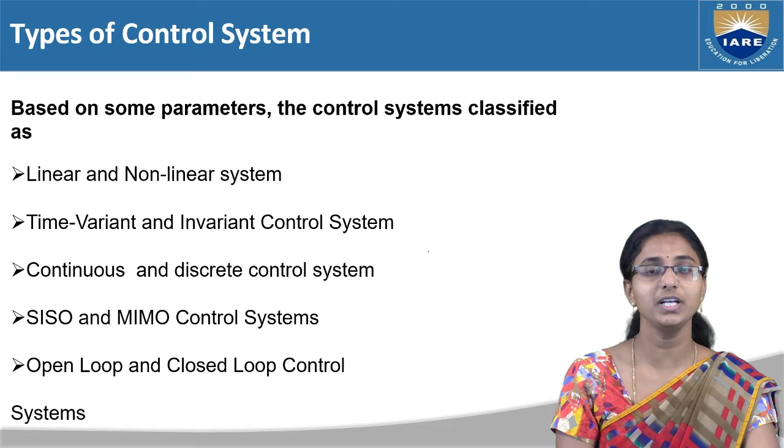Based upon the parameter of feedback, control systems are classified as open loop and closed loop control systems. These are the classifications based on each parameter. Now we will study in detail about open loop and closed loop control systems. So what are the two main types of control systems? Open loop control system and closed loop control system, classified based upon the connection of feedback.

Now we will talk about open loop control system. A control system in which the control action is totally independent of the output of the system is called an open loop control system. So what does this mean?

Let me take the example of a fan again. My fan is also a control system. By using a regulator with a fan connection, it becomes a control system. But if I want to change the speed of the fan, how do I do it? I manually go near the regulator and change it. This is done in an open loop system. So manual control systems are also known as open loop control systems — a control system in which the control is operated manually. Such systems are called open loop control systems.

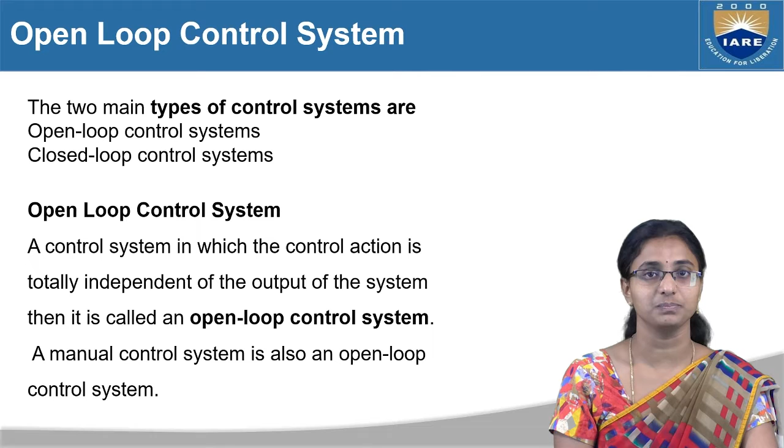So now let me consider this block diagram as a control system here. So here also we are having a system. So this is my system, right? And to this system I have used a controller. Okay, and here we are going to give the input. Already in the last class I have said to you, in a control system the input is always known as desired output. Okay, so I have given some sort of input here.

So just again recall the fan here. I'm giving an input, and this is nothing but indirectly regulated here. So here the system is nothing but the fan, it is operating, and I can see the output. Okay, so this is done here. But here, suppose I want to change the speed of the fan, it is not done without going manually. So this is nothing but your open loop control system. Here the function is open.

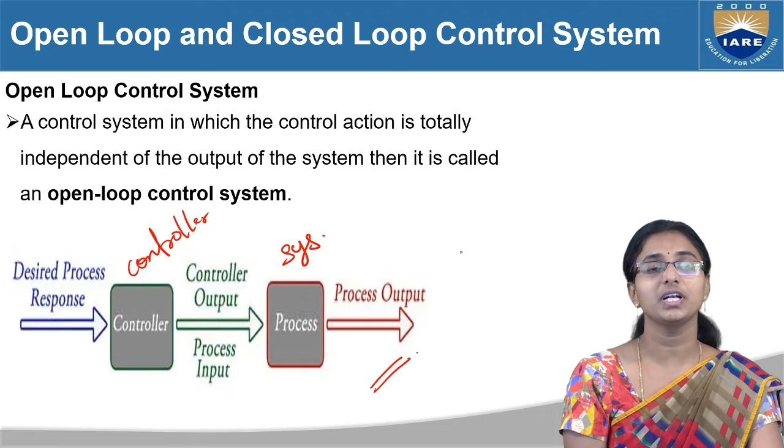Whatever, if you want to change the output here, suppose if you're talking about the speed of the fan, if you want to change the speed of the fan, that is only done by going there manually. See here. Okay, so now let me talk about advantages and disadvantages of this control system.

So the advantage is it is very simple in construction. Since we are having only the controller and process system, giving input and output, the construction is very simple and the design is also simple, and it is also very economical, and very easy to maintain. And here the output is also obtained in a stable way, because if I'm using a regulator, according to the regulator's setup only the fan is going to run, right? So we can say that it is running stably.

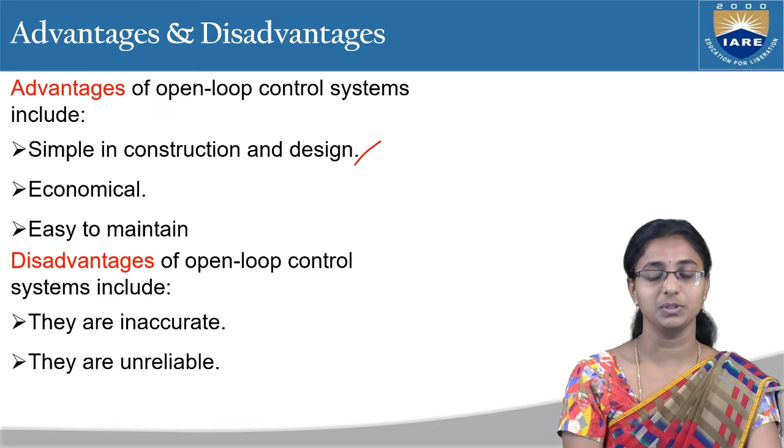And what are the disadvantages here? The accuracy is very low here. The systems are inaccurate and they are unreliable. Okay, so these are nothing but the real-time examples of our control system.

First is nothing but the sprinkler used to water the lawn, right? Whatever examples I have considered here are very simple, which we are seeing in our day-to-day life, right? So first one is the sprinkler used to water the lawn. Okay, so already we have seen this one. In the lawn we are going to use a sprinkler, right? So that is going to rotate. It is given some specific time there.

Some sort of time is going to be set in the sprinkler, so it is going to rotate and it is sprinkling, but it is not going to sense the weather. So suppose your complete lawn is wet, but still your sprinkler is not going to turn off. So in order to turn off the sprinkler, we manually have to go there and turn it off.

Okay, and next is your washing machine. So what is this washing machine here? Suppose you are taking the washing machine, here also it works according to time. Here we are adding the load into the washing machine, and we are manually setting the time; it is not automatically taking the time. So this washing machine is processing with the time-based process. It is depending upon the time value.

And next is your traffic signals. This is also a common example which we are seeing in our day-to-day life, right? Whatever traffic signals we are seeing on the main roads, there we are going to use a time band, irrespective of the traffic. Suppose the traffic may be high or low, there we are going to give some specific time. So according to the time only your traffic signals are operating.

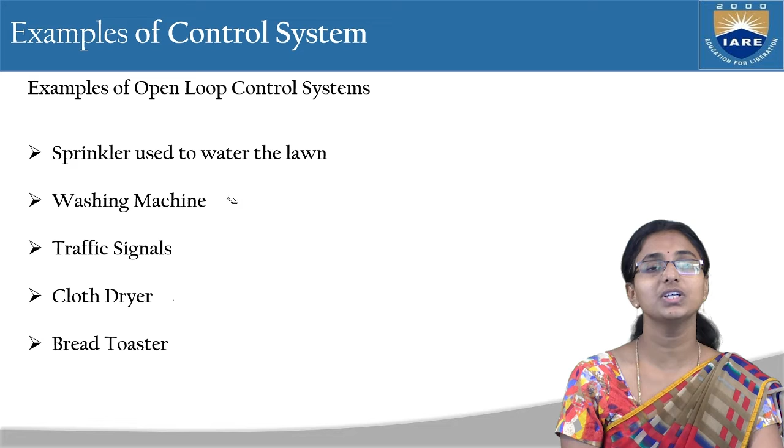So now let me see what a closed loop control system is. A closed loop control system is a system where the output has an effect upon the input quantity in such a manner as to maintain the desired output value, right? So the only difference between open loop and closed loop systems is this feedback, the connection of the feedback path.

In the open loop system, the feedback connection was not given. If I give a feedback connection to my system, then that system is known as a closed loop control system. So what is the main operation of this feedback? Suppose I have given some input here, the controller is identifying the differences, this is the system which is operated, and the output. Before we see the output, it first goes through the feedback, and this here is the error detector.

Suppose we take an example of 10 volts as an input, and actually my desired value is around 9 or so, but I have got 6 volts as my output. This 6 volts goes through the feedback and is given to the error detector. The controller identifies the differences between the input value and output value. If the difference is large, the manipulated value is again processed in the system, and finally we get a controlled output, or actual output. This is only possible with the feedback connection.

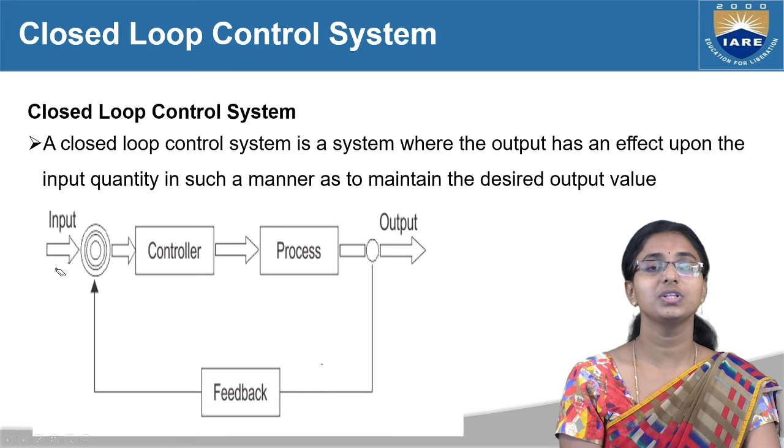And if we talk about the advantages of these control systems, already we said that it is very highly accurate, and the range is large, it facilitates automation, it is less sensitive, and the system is less affected by noise. Okay, so we know that it facilitates automation. Like if we take an example as AC, right?

In the open loop control system, if we want to change the speed of the fan, we have to go to the regulator and change it, right? Manual operation is done there. Okay, manual correction is done there. But in the closed loop system, automatic correction will be done. Okay, so these are the advantages of your closed loop control system.

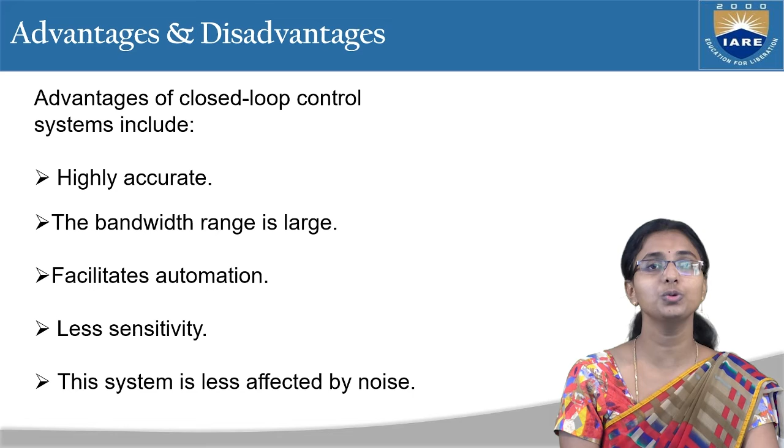So if we talk about the disadvantages, by installing the controllers and sensors, the system will be costly, the design will be a little complicated, and it requires more maintenance. And here, due to the feedback connection, an oscillatory response can occur, and overall gain will be reduced. Okay, these are the disadvantages of your closed loop control system.

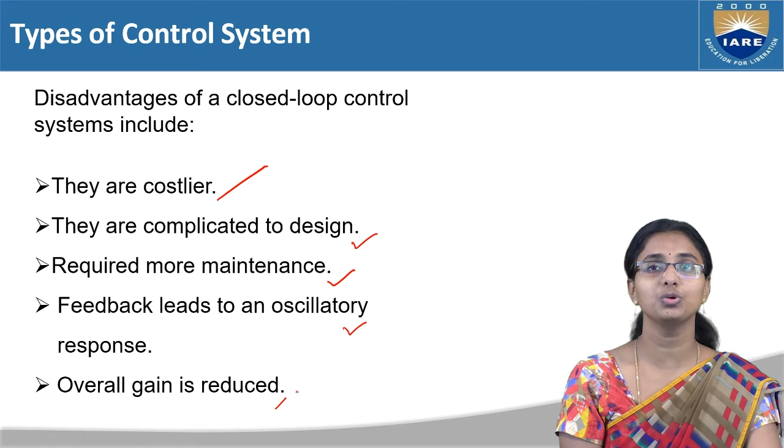So if you are using this water level controller, it identifies the level. Whenever we give some specific level as the output, after reaching that level it gives an alarm, and by listening to the alarm we go and switch off the motor. So by using this water level controller, no water will be wasted. Here the sensor will always be monitoring the level of the water, whether it has been reached or not.

Suppose in between you open the window, some hot air enters the car. The sensors inside the cooling system monitor continuously. Whenever they feel a little change in the temperature of the air in the car, it again starts circulating, so whatever desired input you have given comes as output, even if you open the windows. This is nothing but the temperature controller system.